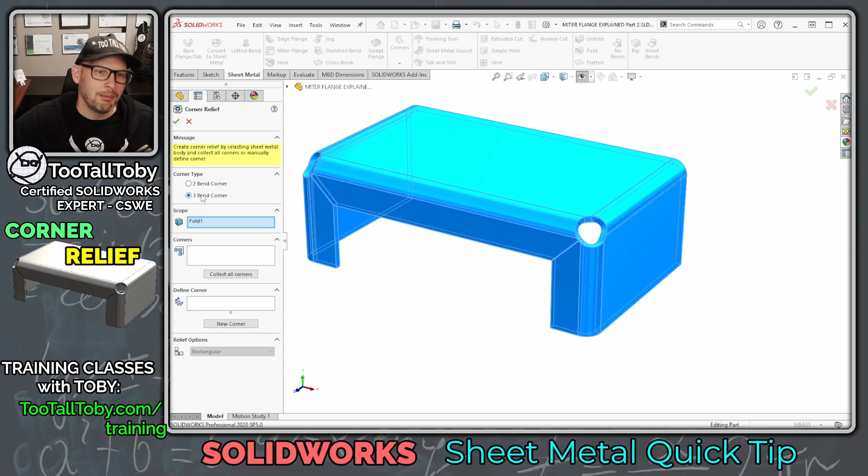Now, the truth is that there are tools built into SolidWorks to help with corner relief. If you fly out the corners menu, you can see there's a tool called corner relief, and you can choose to apply this to 2 bend corners or 3 bend corners. But in my experience, this is kind of hit or miss. Sometimes it works, sometimes it doesn't.

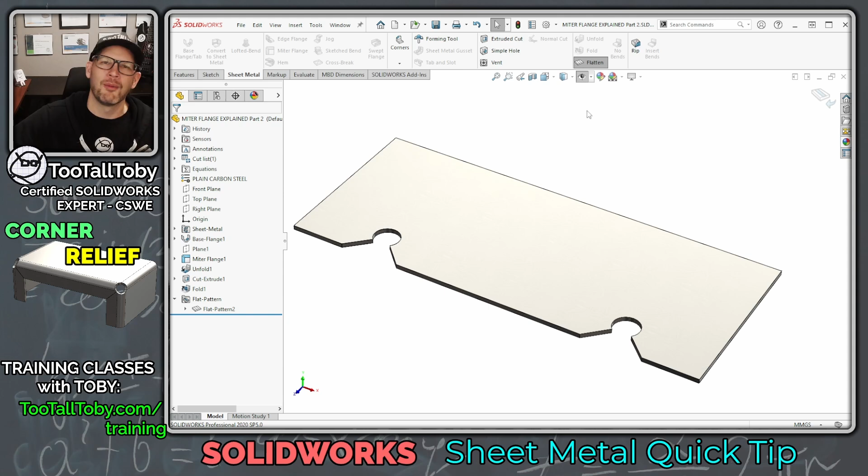So what I'm going to show you today is how to use the unfold command, how to create a cut extrude, and then how to use the fold command to end up with a sheet metal part like what we see here. This part can be flattened, so you can export it to DXF to send out to your plasma cutter, laser cutter, water jet, or whatever the next step is in your manufacturing process.

So let's do this part from the beginning. I'm going to choose to create a new part here, plain carbon steel in millimeters. Then I'm going to go to the front plane, begin a sketch, press the S key, and create a rectangle. This rectangle is going to have the dimension 60 by 175.

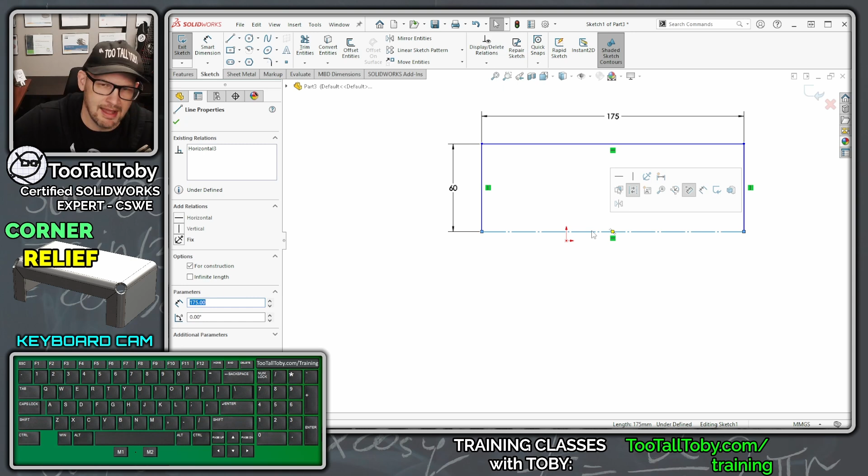Then I'm going to hit escape, and I'm going to take this lower line and make it for construction. Then I'm going to pick that lower line again, hold control, pick the origin, let go of control, and choose to make that midpoint. So if you're following along as a step-by-step tutorial, this is what your first sketch should look like.

Then we're going to go to our sheet metal tools. I'm going to right mouse button here and say tabs, sheet metal. Make sure that sheet metal tools are enabled. We're going to go to our sheet metal tools and choose base flange / tab.

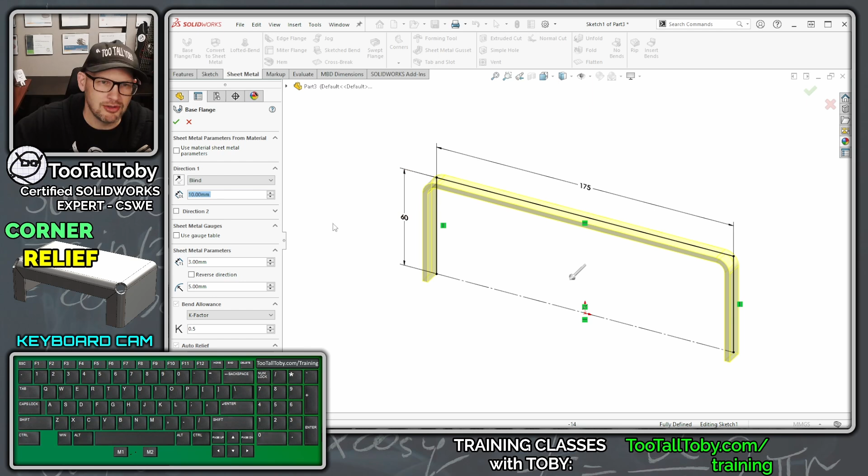Now, once we choose base flange / tab, we're going to set the depth to 100 millimeters. And then if we look at this thing from a front view, so you can press Control-1 to get to a front view, we're going to use the reverse direction button here to make sure the material is going to the inside of our sketch.

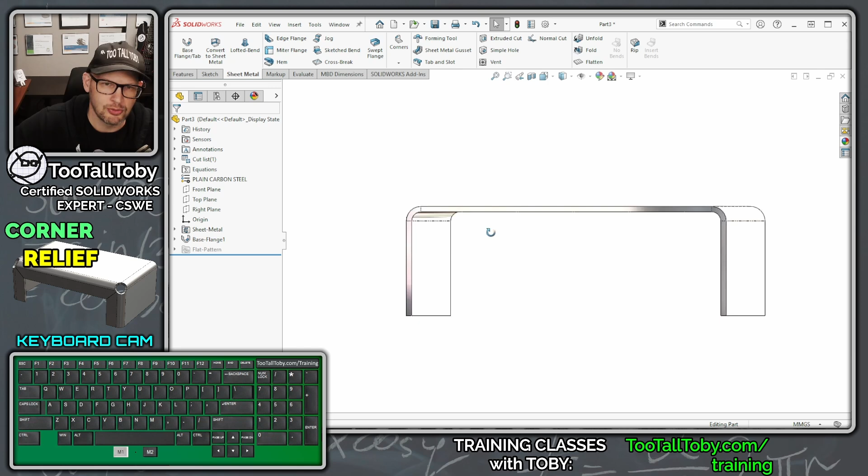Finally, we're going to say that we want the wall thickness to be 3 millimeters and we want the bend radius to be 5 millimeters. You can press Enter twice, and there you go. There is your sheet metal base flange.

Now we're going to choose to create a miter flange. So you might remember from my earlier video, if we click here on this edge and then we choose sketch, that puts us into a new 2D sketch on a new plane that's created at the end point of that edge we selected. We just picked an edge and then did a shortcut to create a new plane.

And then we're going to create a horizontal line at 20 millimeters. So I'm going to hit escape here. And there we go, there's our horizontal line at 20 millimeters.

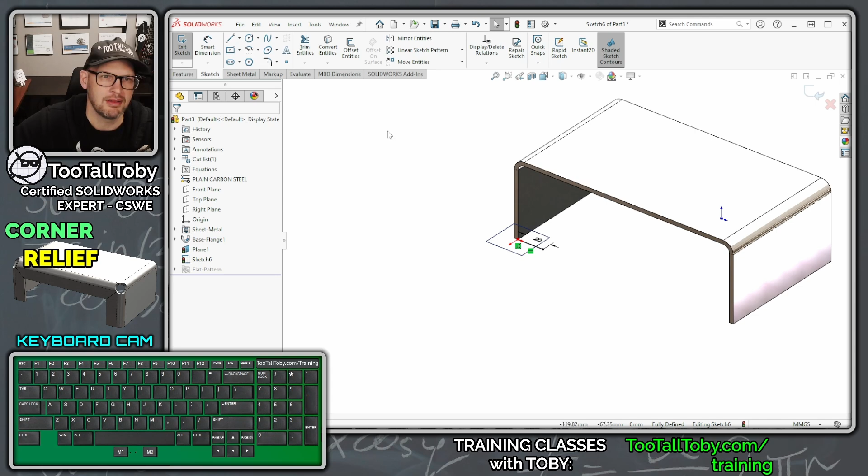Then we can choose sheet metal, miter flange, and we can click this button here, this propagate icon, and propagate that miter flange up and around. And we're going to say that's going to be bent to the inside, so material outside, bend outside, and material inside - that first option there. We hit the green check mark, and this is what we're left with.

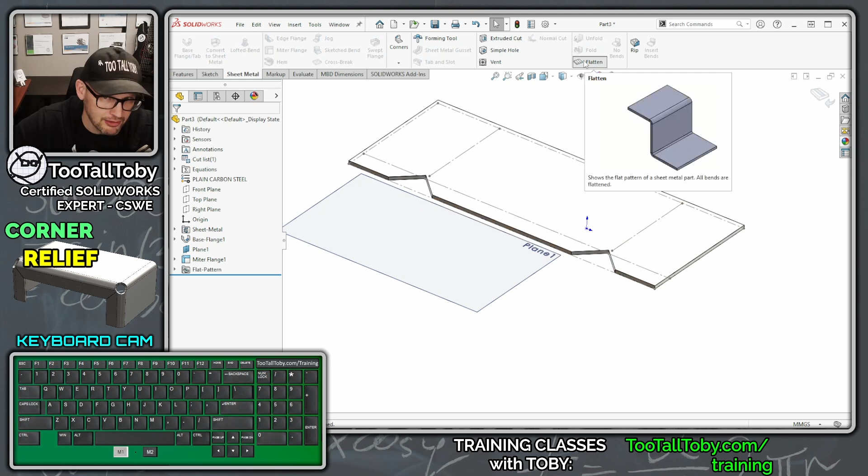Now, this looks pretty good, except if we look at it in a flat pattern, it doesn't quite look right. It really should look like kind of 90-degree bends here.

And so what we can do is go over to the flat pattern feature, expand this folder, and then right mouse button here and say edit feature on the flat pattern. This is something we talk about a lot in the training class, the flat pattern feature and some of these different options in here. But one of these options is the option for corner treatment.

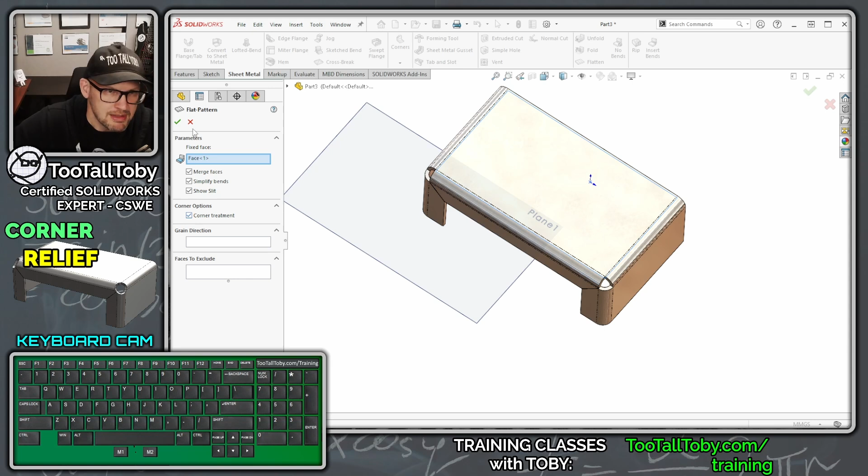Basically what that option means is if we leave that option checked on, we're going to go into a flat view here, and then we're going to choose the option for corner trim, and then we can go around and pick these little edges here and choose to create a radius. Let's make that an 18 millimeter radius or diameter, running through that corner to kind of clear out that corner so that we can bend this thing up.

Now that works. It certainly works okay, and it works good when you're going out to your flat pattern.

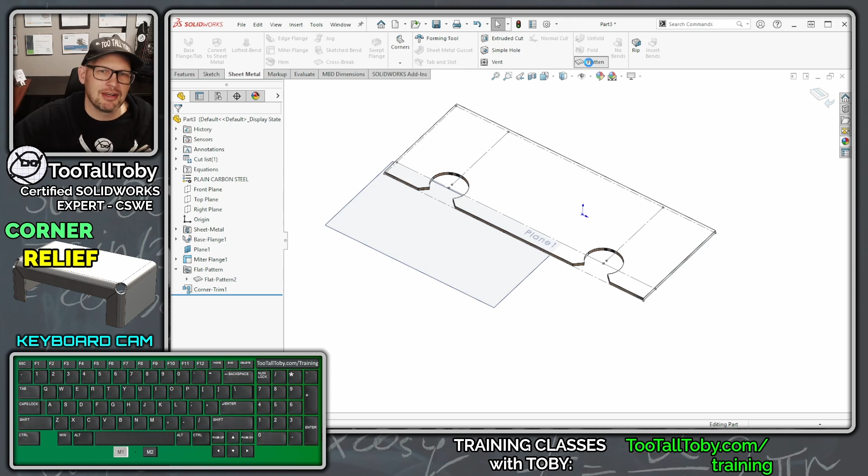But the thing is, when we go back into a formed view, we don't see that relief. And the reason why is because this feature here occurred after the flat pattern.

A lot of times what we talk about in sheet metal is what I like to call the sheet metal sandwich, which means that everything should really come between this sheet metal feature here and the flat pattern feature. Everything you create should land inside of that sheet metal sandwich.

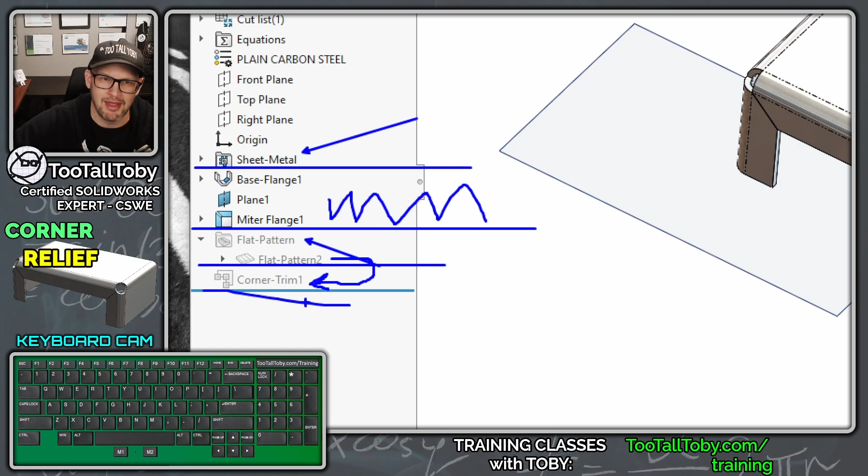So because that corner trim shows up after that flat pattern, it's not going to show up in the formed view, and personally, I just don't really like that.

So I'm going to go back into my flattened pattern here, and I'm going to get rid of that corner trim. Let's get rid of that.

Let's go into our flat pattern option, right mouse button, edit feature, and let's turn off corner treatment. We hit the green check mark, and now that looks okay.

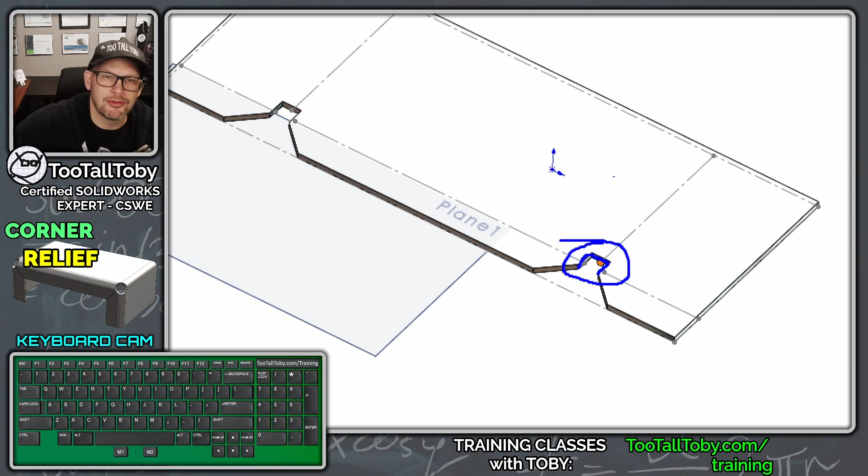But the thing is, with our machinery that we have, we can't really cut like this, or bend when it's cut like that. We really need a circular relief, kind of like what we saw a moment ago. But we also want to see what that's going to look like in the formed view so the customer knows what they're getting. So here's how we do that.

We get out of the flat pattern function, so click this button here for flatten, go back into the formed function, and then we choose the command unfold.

For unfold, what you do is you tell SolidWorks, I want to hold this face here, and then I want to unbend this bend and this bend and this bend and this bend and this bend.

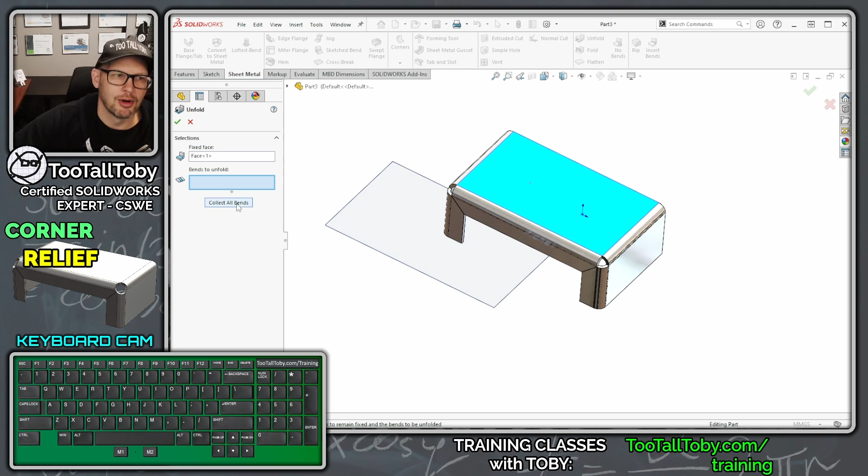Instead of going around and clicking on all the bends, here I'll right mouse button and say clear selections, and we're going to say collect all bends. So when we say collect all bends and then hit the green check mark, now that whole thing becomes unfolded.

So we're still working here in the sheet metal sandwich. We've got this sheet metal feature, the flat pattern feature, and here's the unfold feature. We're still working inside of that sheet metal sandwich. We just added that unfold here inside of it.

So now that we've got that unfold, we can pick this face here, begin a sketch, and we can create the geometry for our cuts.

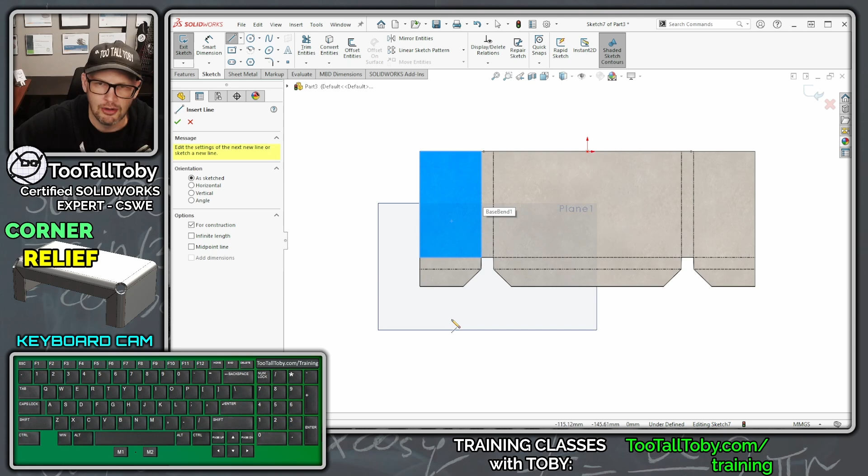So what I'm going to do is make a new construction line here. S key, construction line. I'm going to put it right here at the midpoint, and then I'm just going to bring that out to a distance of, say, 6 millimeters.

And then I'm going to create a new circle. S key, circle. I'm going to make a circle here with a diameter of 18 millimeters. I'll do the same thing over here on this side.

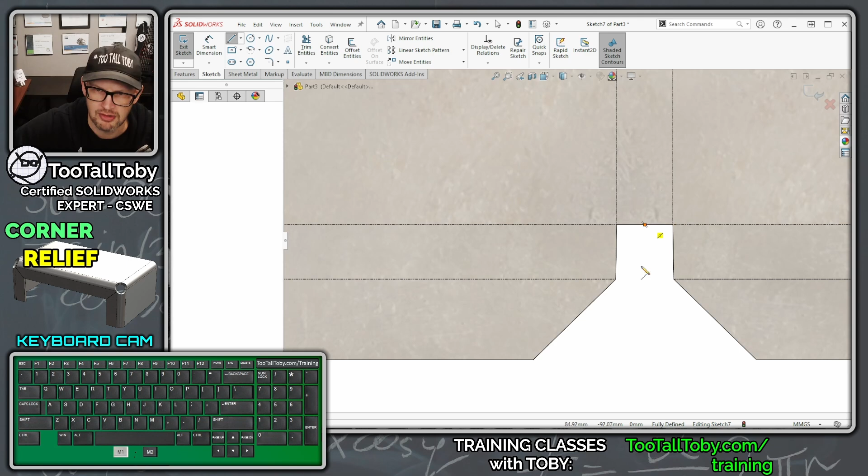We could also mirror it. So create a construction line here, bring that out to 6 millimeters, and then create a circle. That circle is going to have a diameter of 18 millimeters.

Now that I've created those two circles, we're going to go to the command features, extruded cut. And for this extruded cut, we can use this option here, link to thickness, so the depth of the cut will always be the same as the sheet metal wall thickness. We hit the check mark, and there we go.

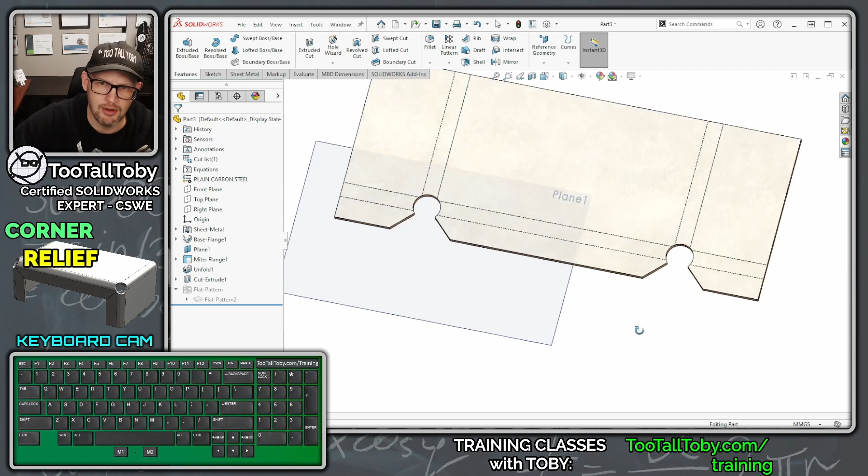Now we've created those cut reliefs, but you'll notice that that cut is taking place here inside of the sheet metal sandwich. That's what we want. We always want everything to take place between the sheet metal folder and the flat pattern folder.

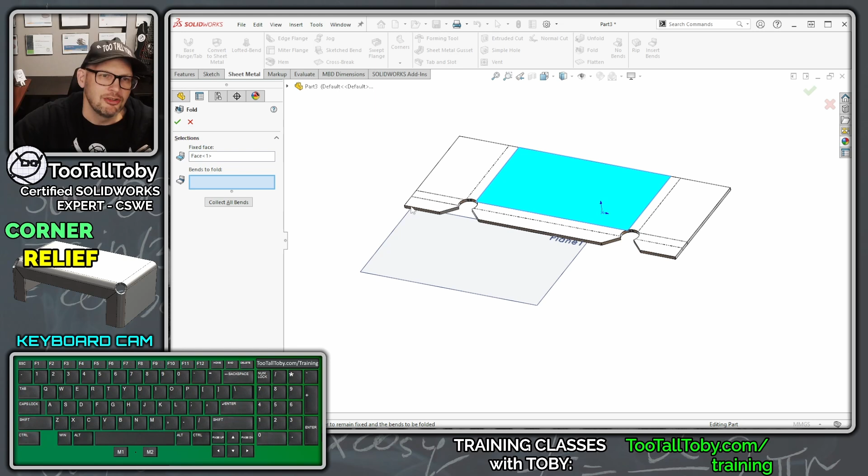So now let's go to the command sheet metal fold. SolidWorks automatically picks up on this face here as our fixed face, the same face we picked when we made the unfold. So now all we need to do is say collect all bends and hit the green check mark, and boom, look at that.

We did it. We created our corner relief. So that's my preferred method.

Like I said, you can certainly go in here and use the corners option and the corner relief tool, and a lot of times you can get the same result or a very similar result, but I just like this method more because it just kind of always works. This corner relief tool is kind of hit or miss. Sometimes it works, sometimes it doesn't.

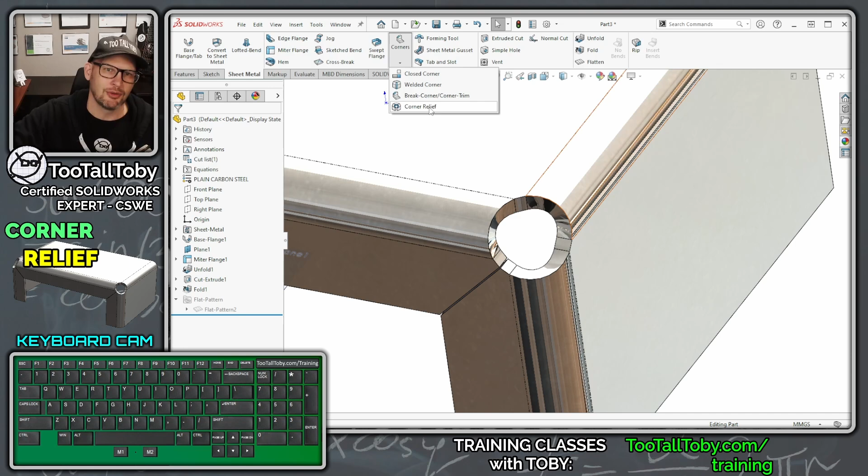But now you can see that we were able to create that corner relief. It looks good here in the formed view. And if we turn this thing into a flat pattern, we can see it also looks good in the flat pattern.

Now we could right mouse button on that flat pattern, and we could choose export to DXF DWG. And then we could send this thing off as a 1-to-1 DXF to our laser cutter, plasma cutter, water jet, whatever the next step is in our sheet metal process.

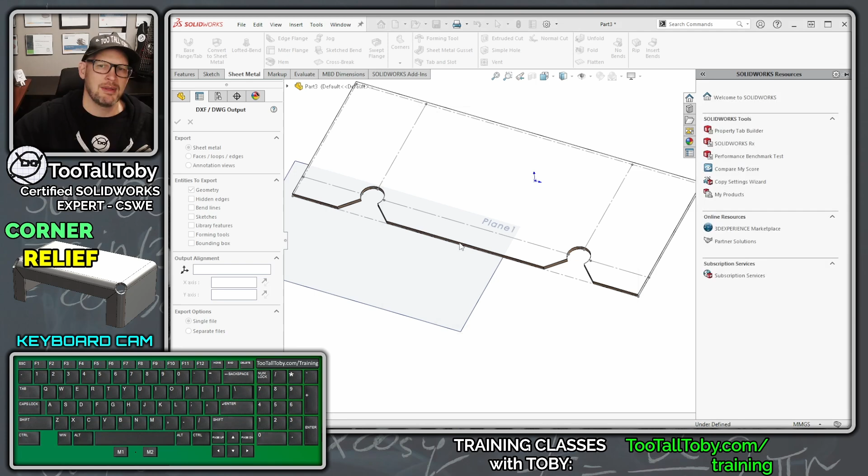So I hope that all makes sense. If you have any questions about this quick tip, let me know down in the comments below.